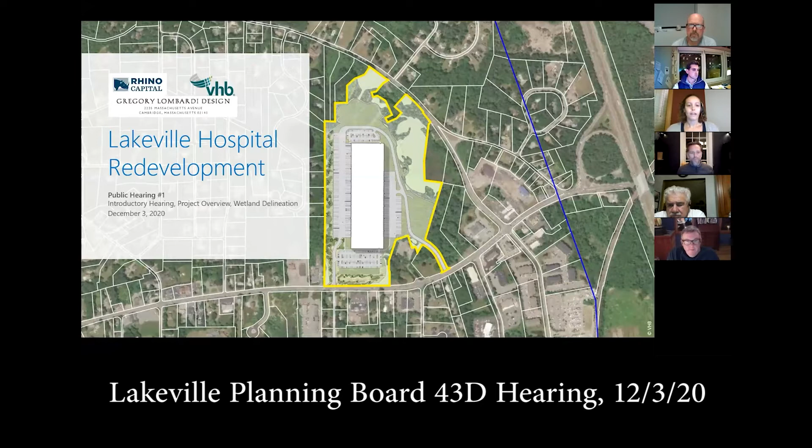As many of you are familiar with, the Lakeville Hospital site is a priority development site under Chapter 43D. The Chapter 43D program provides a tool to allow expedited local permitting for priority development sites to promote targeted economic development.

Because of the size of the proposed project and the Chapter 43D status of the site, the town has elected for a joint public hearing process in which each of the jurisdictional boards and commissions will review this project concurrently. Hence why we have so many boards participating this evening.

As you're all aware, today is December 3rd and represents the first public hearing for this project. Tonight I will provide a detailed overview of the site, including the hazardous material assessment and the wetland delineation completed for the site, then provide a brief introductory overview of the project.

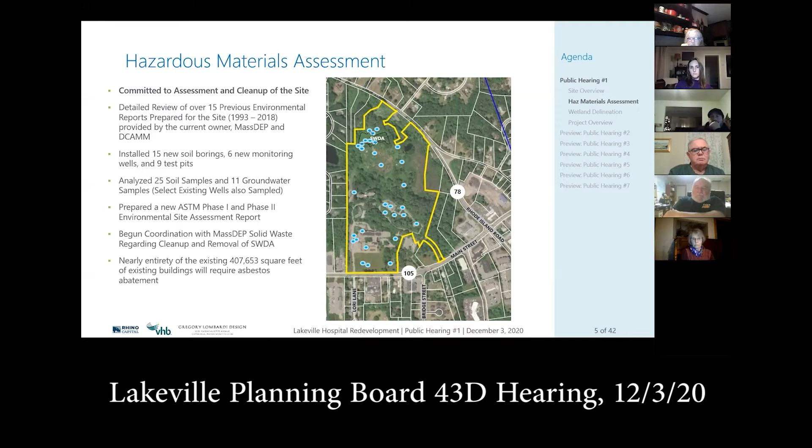An important component of tonight's hearing is to review and discuss the limits of wetlands on the property, irrespective of the proposed project. This is a process that is often completed by way of an abbreviated Notice of Resource Area Delineation, or an ANRAD, although we are proposing to complete this effort as part of the Notice of Intent process.

With that, I'll pass it off to Sarah French, our wetland scientist from VHB, to discuss the wetland delineation. Thanks, Brittany. Again, for the record, my name is Sarah French. I'm the wetland scientist with VHB.

So I just want to mention, it's important to mention, we had an NOI and an ANRAD that went before the Lakeville Conservation Commission back in 2007. The project never came to fruition for different reasons.

But we redelineated that subject area in April of this year, focusing on wetland 1, 2, and 3. Wetlands 2 and 3 are both small, isolated wetlands, so I'm not going to focus too much on those since they're non-jurisdictional. Wetland 1, however, is a large bordering vegetated freshwater, palustrine mix between scrub, shrub, and forested wetlands. So it is a jurisdictional resource area under the Wetlands Protection Act.

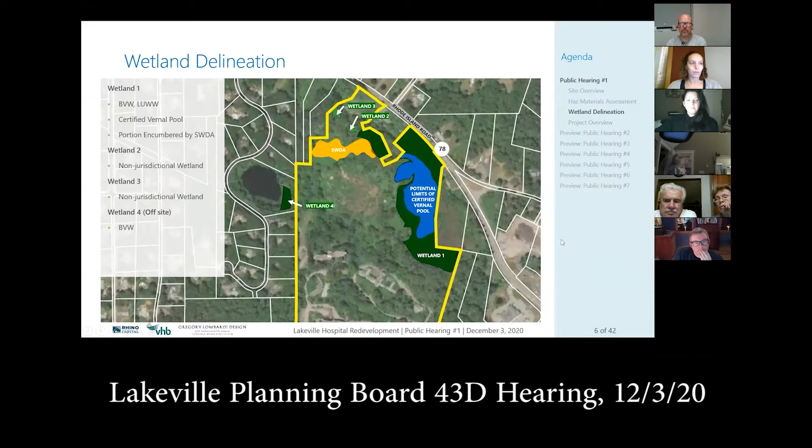Excellent, thank you Sarah. So with that, that's been a lot of discussion about the site, and I know everyone is much more interested in the project. So here we go, without further ado, a brief overview of the project that we're proposing.

We are proposing to replace all of the existing development and infrastructure on the site with a 402,500 square foot warehouse facility and associated infrastructure to support that building. You may recall that is actually less square footage than what exists on the site today, which is approximately 407,653 square feet. But of course, the big difference is the existing development is vertical in nature, and clearly you can see the proposed development is more horizontal in nature.

The project is proposing a warehouse use with loading docks on both of the long sides of the building. This is also known as a cross-dock facility. We are proposing employee parking areas both at the front and the rear of the site, and truck storage areas opposite the loading docks on both of the long sides of the building.

Additionally, there are 2 land-banked parking areas also proposed for the project at the front and the back of the site, which would allow for additional employee parking to be constructed if a future tenant deems that the additional parking is necessary to support the operations. However, if a tenant deems that they don't need that additional parking, the applicant is fully committed to not constructing that additional parking and keeping that area landscaped.

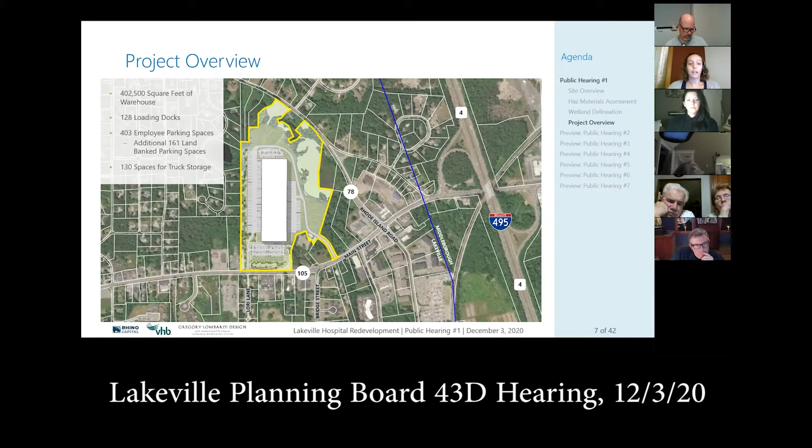As I mentioned at the beginning of the presentation, today's meeting is mostly focused on a high-level introduction of the site, the project, and the wetland delineation. However, we do intend to provide a high-level overview without diving into the technical details of each of the remaining topics that will be further explored in future meetings. So with that, I'll introduce the topics of public hearing number 2, which will be held 2 weeks from today on Thursday, December 17th, and will further explore in more detail zoning, use, site layout, parking, access, and circulation for the site.

The site is located in several underlying and overlying zoning districts. However, the overlay district within which we are proposing the project is the Development Opportunities District. The intent of the Development Opportunities District is to provide opportunities for economic development expansion in planned multi-use districts while protecting the natural resources of the town. Within the DO district, warehouses and wholesale distribution centers are permitted by special permit where the planning board is the special permit granting authority.

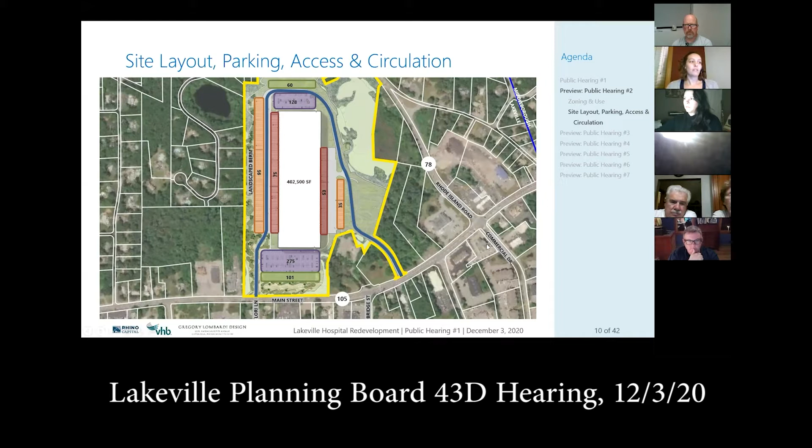That concludes the introduction of public hearing number 2. Public hearing number 3, which will be held on Thursday, January 7th, will discuss in detail the architectural, noise, landscape, and lighting components of the project. So with that, I will hand it off to Tyler Murphy of Rhino Capital, who will provide an overview of the architectural renderings and elevations for the building and the noise study completed for the project.

Great, thank you Brittany. So what we're looking at here is a rendering of the building, and this is the view from Main Street, looking at the right corner closer to Walgreens. What you can't see is a roof that's going to be a white membrane TPO roof, which is typical for this type of product. And the paneling system that you're seeing is something called tilt-up.

Tilt-up is interesting in the sense that basically a poured concrete panel gets laid down, poured, and the lines and designs you're seeing within this picture are actually formed within the concrete. Once they're tilted up, painting occurs, and that's where you see these blue, white, and gray tones that are presented here. After that, typical storefront style windows and doors are placed in, and this would represent the main office area of the building.

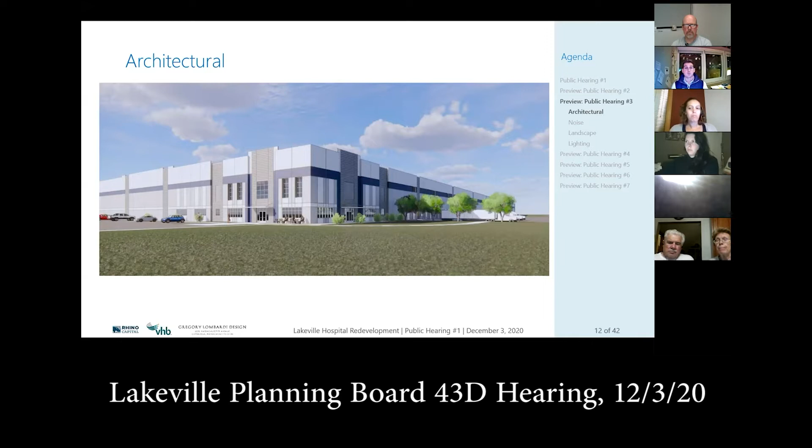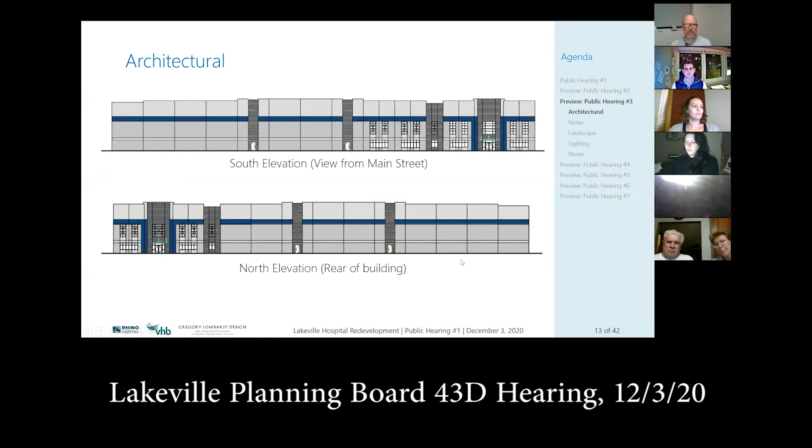And then we have the rush pond side and wetland side, as we're calling it, of the building, where you can see the loading docks. You can see that blue band continues through, and then there's clerestory windows, the small white dots you're seeing, which allow some light into the building and help break it up a little bit.

Moving on to noise. The goal of the noise discussion, and back to Brittany's point earlier about not getting into a high level of detail, is to touch on noise and talk about how the data is gathered and how the process works, more so than the actual individual data. So L90 ambient data gathering is essentially setting the baseline for the project, trying to understand what level of noise we're dealing with on this site and in this area.

So it goes for multiple days. In our case, it was 10 days of monitoring in the later part of September.

The L90 portion means it's excluding the loudest 90% of the noise that's gathered. So once they've done that, they look at the quietest hours, and they take the 10% of the quietest hours, which ends up being about 6 minutes. So what they're doing is chunking down 10 days of continuous data, 24 hours a day, finding the quietest hour within that, and then taking the quietest 6 minutes within that in order to establish a baseline.

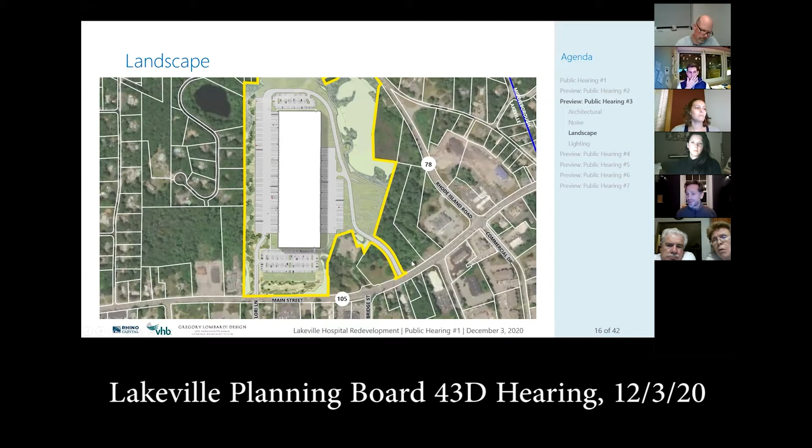Brittany, maybe if you could go to the next slide. Sorry, I just started to talk about this, this is the overall vision. So you can start to see the topography in the landforms that are happening along the margins.

So the planting palette is purely a native plant palette. We're integrating not only flowering elements, flowering trees to this project, but also evergreen, like native cedars that are durable and can withstand the climatic issues that we tend to come upon. The other part is that the height of the cedars will get significant to create that long-term screen to the property.

The other thing that's exciting to us in terms of Rhino Capital's involvement is that they were willing to commit to a 2-year watering of this project. So, from a landscape professional standpoint, day one it's always a beautiful thing. These new plants go in, they try to acclimate to the site. A large portion of them struggle if there's not irrigation, and then the landscape starts to fall apart.

In this case, we don't have that. We have a client, an owner, that's willing to commit to providing water to these native plants for a 2-year time period, which will allow them to acclimate, and then use just natural rainwater once they've acclimated to the site, which is really exciting.

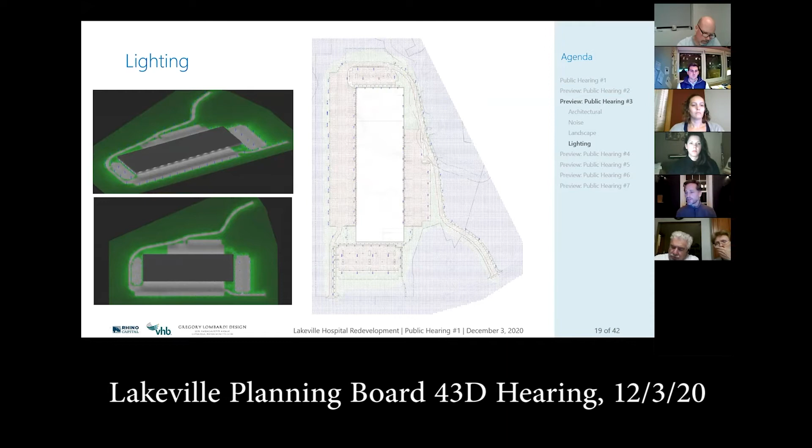And that's the big picture right now. But I'm just thrilled to be able to share this idea with you, and I'm happy to field any questions or thoughts or comments.

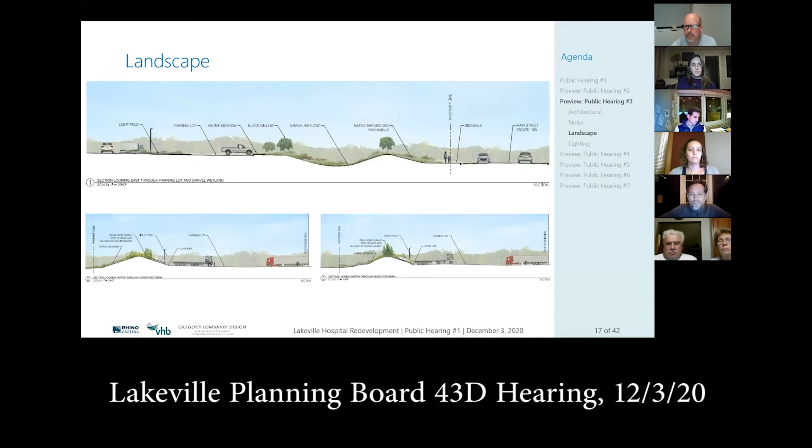Yep, we appreciate that. Brittany, could you unshare your screen and go back to gallery view? Thank you. I don't want to get too far into the weeds. If people have a lot of concerns about the noise and the landscape, that will be addressed on January 7th at the landscape, lighting, and noise public hearing. I think the comments tonight from the abutters give the Rhino team and Lombardi Design something to work on. I don't know if you'll come back with more detail at that point, a bit more in depth with the site plans and the grading so it's better explained.

And I think Mr. Scott's comment regarding peer review on the noise—I'd like to briefly go to Scott Turner from Environmental Partners. He's the representative the town has hired to do all of the peer review disciplines on this project, and they will be reviewing the sound. Scott, if you could speak to that briefly.

Yeah, so for these two items we actually have two sub-consultants reviewing both the sound and the landscape. We have the IBI Group, who I've worked with for years, doing a review of the landscape plan, and we also have Epsilon Associates doing a review of the sound study that was done. They'll be prepared to present that during the hearings in January. They're currently doing their review now.

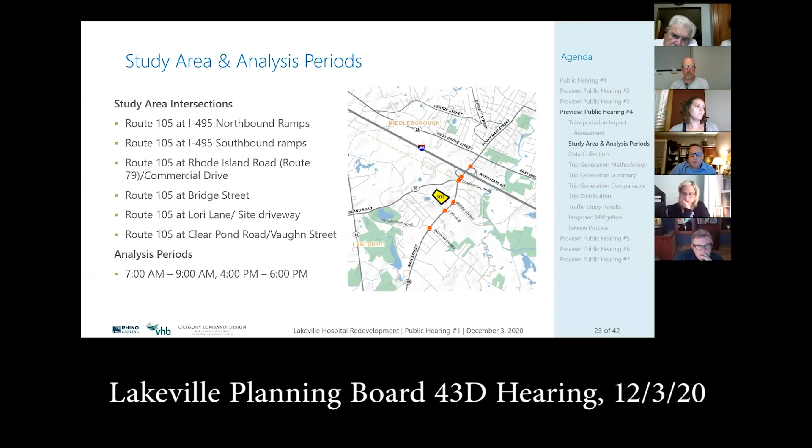As far as what periods we analyze, we usually focus on the weekday AM peak hour, which is 7 to 9 AM, and the weekday evening peak hour, which is 4 to 6 PM. Those are the two time periods where background commuter traffic and our project traffic would be at its peak.

In terms of data collection, obviously with COVID, traffic volumes are definitely affected. So we wanted to find as much good traffic data as we can from before COVID. As part of the South Coast Rail project, there were a bunch of counts done at our study area intersections, so we reused those counts.

We also conducted counts in September of 2020 for the whole study area to understand how different the volumes were under existing conditions, fill some holes where we didn't have volume data, and figure out how we could adjust those volumes.

As Brittany mentioned, Route 105 is MassDOT owned, so everything we do has to be coordinated with MassDOT. We worked with them to adjust all those 2020 volumes, which were taken under COVID conditions, using our previous volumes and establishing adjustment factors to their satisfaction, so we created a good baseline to evaluate existing conditions.

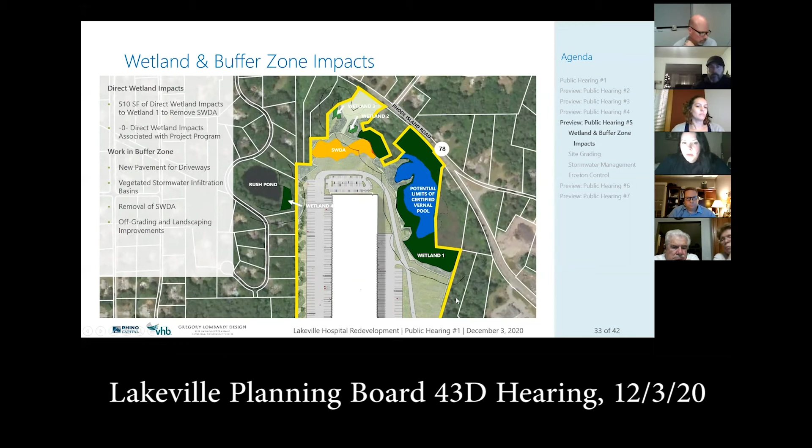Thank you, Sarah. So site grading: existing grading for the site, as we've already discussed, includes some rolling topography throughout, and that's very reflective of the widespread site disturbance that occurred throughout the entire 1900s for nearly the entirety of the site when it was used as the Lakeville State Hospital.

The proposed grading for the site will mimic the existing topography to the maximum extent practicable. The overarching goal of the proposed topography is to balance bulk earthworks on the site and minimize the amount of material that needs to be exported from or imported onto the site. There will need to be some raw materials brought onto the site to support construction, like gravel, asphalt, concrete, etc. Additionally, some materials will be unsuitable for redevelopment and will need to be exported, specifically those in the solid waste disposal area. However, ideally, the bulk soil will remain on the site to allow for generally balanced earthworks.

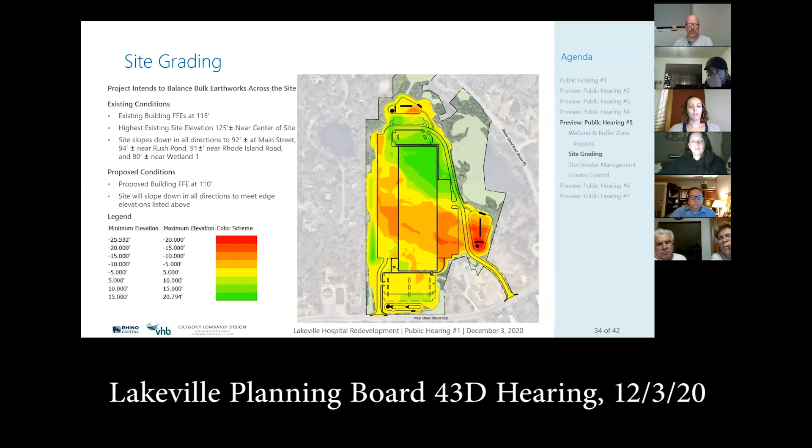Stormwater management. A new stormwater management system is proposed for the project in accordance with the Massachusetts Stormwater Management Standards, implemented as part of the Wetlands Protection Act. Specifically, the project will install a new closed drainage stormwater management system that will collect, detain, recharge, and treat stormwater runoff from the site.

There are 4 stormwater basins proposed as part of the project, including 2 surface vegetated infiltration basins, shown by the blue circles at the top and at the east. There's 1 subsurface infiltration chamber system, shown here in orange, and 1 gravel wetland, shown by this purple circle at the front.

Just to be clear, since there was a reference to it earlier in the hearing, a gravel wetland is not a wetland under Mass DEP jurisdiction. It is a stormwater BMP that acts as a wetland to treat stormwater.

The stormwater management system has been designed so that there is no increase in peak rates of runoff from the site compared to existing conditions. It's also designed to recharge 4.5 times the volume of stormwater required for recharge per the stormwater standards. Additionally, it will provide a treatment train that removes 80% of total suspended solids from the 1-inch water quality runoff volume from all impervious areas.

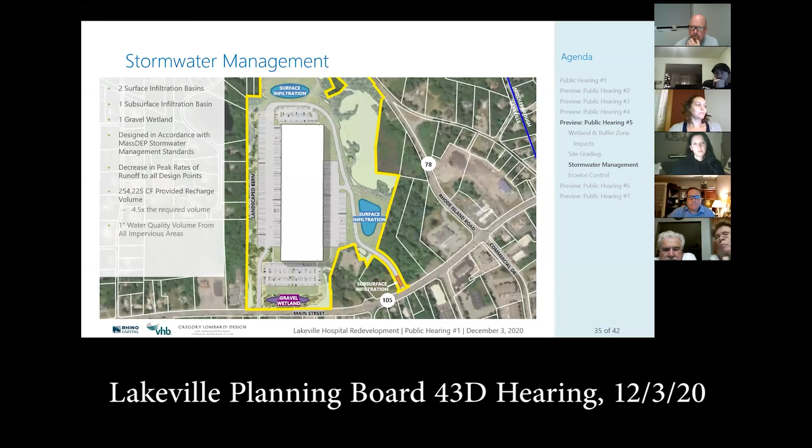Erosion control. This project will disturb more than 1 acre of land, so it will be subject to and will obtain coverage under the EPA's National Pollutant Discharge Elimination System Construction General Permit, or NPDES CGP, throughout construction. As required under this permit, a Stormwater Pollution Prevention Plan, also known as a SWPPP, will be developed and submitted to the EPA before land disturbance begins.

The SWPPP will be a dynamic document that is updated continually throughout construction. Generally, it will outline in detail the required erosion and sediment controls and best practices for pollution prevention, some examples of which, but definitely not all, are shown on the slide here.

Some examples include straw wattle and silt fence, which we'll propose at the perimeter of all work within the 100-foot buffer zone to any wetland areas. Areas not within the 100-foot buffer zone will have straw wattle around the entire perimeter of the site. We'll also propose silt sack sediment traps in existing and proposed catch basins for as long as they are connected to the drainage system.

Both curb cuts will be installed with stabilized construction exits to ensure sediment track-out from the site is reduced as much as possible. There will also be temporary sedimentation basins throughout the site during construction, managed by the contractor.

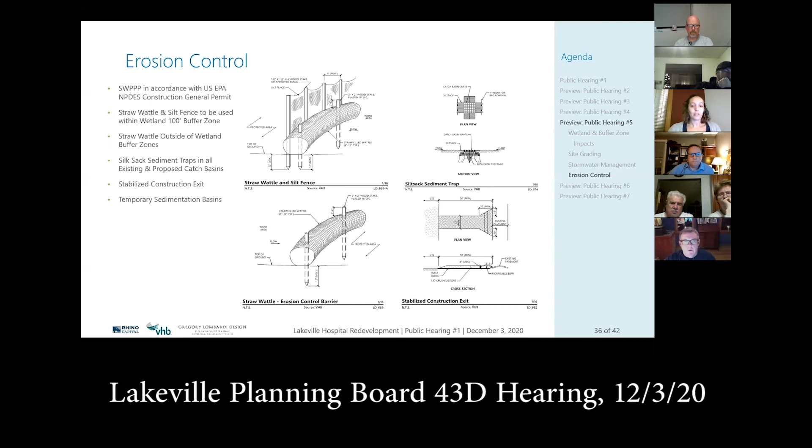And that brings us to public hearing number 6. So we're getting there, folks. Public hearing number 6 will focus on the septic system proposed for the project and the utility services. That hearing will occur on February 18th.

The project will be serviced by an on-site septic system, similar to what many of you have on your own properties, except larger to support the size of this facility. The system is sized to support a 6,045 gallon per day flow, per Title V, and will be a pressurized system with duplex pumps. On September 15th, 2020, we completed test pits and percolation tests, witnessed by the Board of Health, to support the design of this septic system.

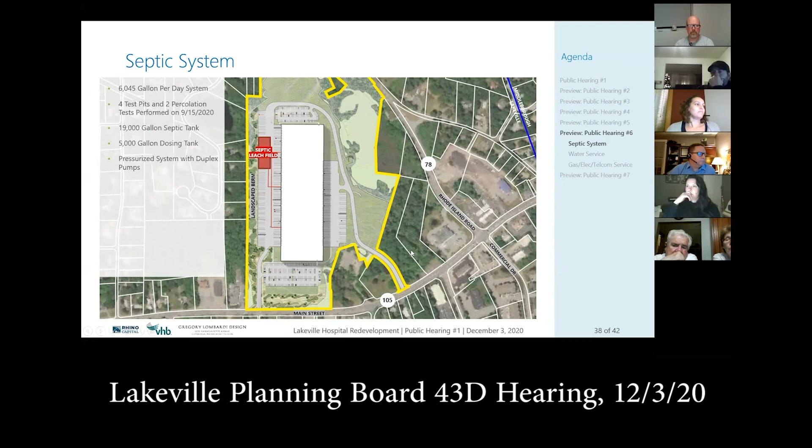Water. The project will be serviced by public water, provided in Main Street and serviced by the City of Taunton. This main will provide domestic and fire protection water service to the facility. As previously mentioned, there is no irrigation proposed for the project. The proponent will work with the Board of Selectmen to petition for water allocation for this project. We are proposing 3 fire hydrants on site as shown here, though we will continue to work with the fire department to ensure these are adequate.

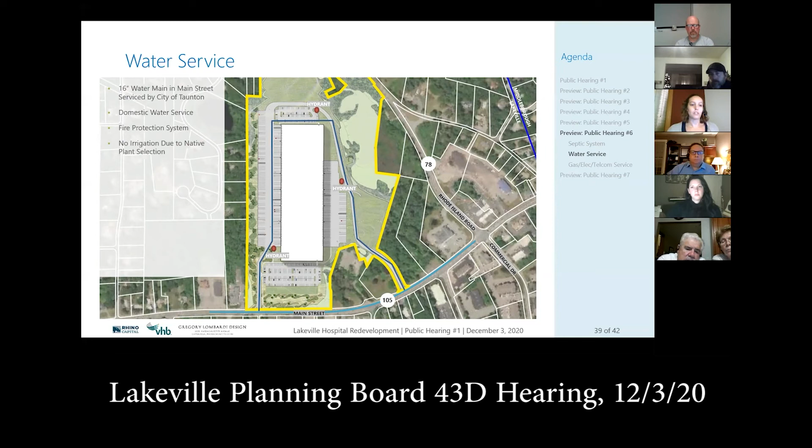Private utilities: gas, electric, and telecom are all available within Main Street along the frontage of the site, and the applicant will work directly with the private utility providers to secure service for this facility. The project is also proposing an on-site emergency generator.

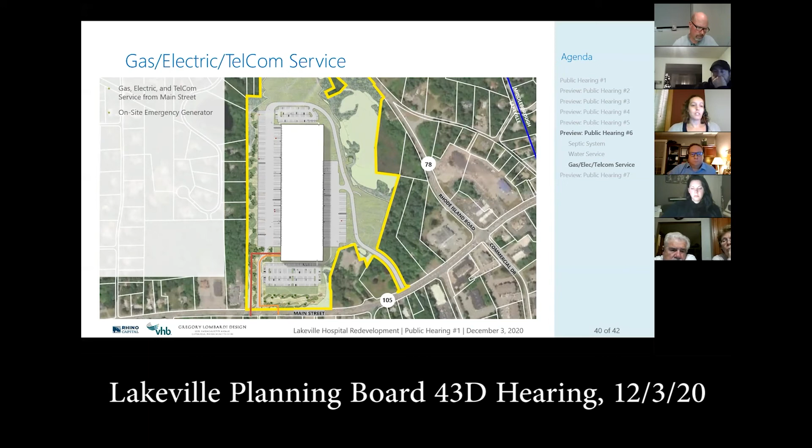And with that, that brings us to public hearing number 7, the final public hearing we're proposing for this project. It's tentatively scheduled for March 4th, during which we hope the jurisdictional boards and commissions feel comfortable taking a vote on the project.

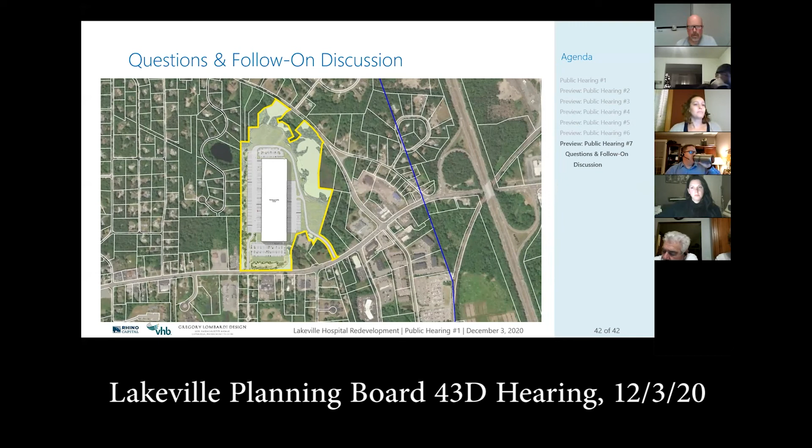You're welcome. Actually, I'd like you to take the slide down if you don't mind, just so it's easier to see everybody on the screen.

So at this point, there were some traffic concerns brought up in... hang on. Lost you guys.